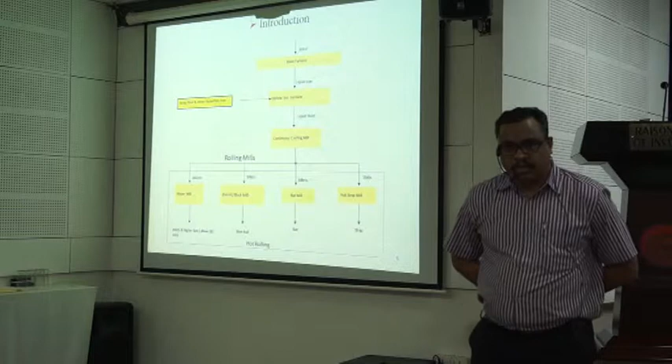How much time are you planning to take? It will take 40 or 50 minutes. Are you comfortable if I ask questions in the middle? No problem. No sir, we can answer at any time. No problem.

So this is the single line diagram showing the flow of a generalized steel industry. This complete research work is for Sunflag Steel—this part shown here is a part of Sunflag Steel. So the rolling mill is the area of interest for this research work.

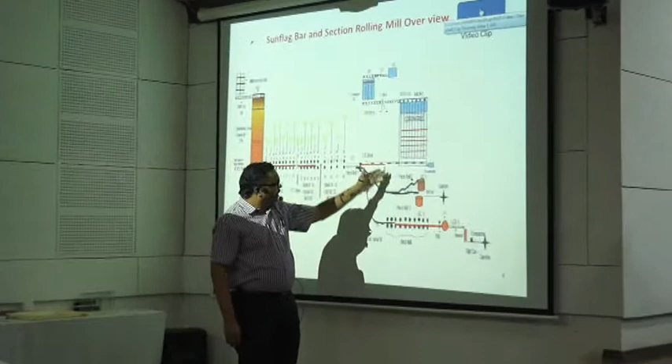So this is the overview of the research work. We'll start the video—overview of the research work, and this is the backup mill. This backup mill is the focus of the research work. Here the mill, the backup mill, is fitted to all three lines: the cooling bed, the garret, and the block mill.

This video clip shows exactly where this research work was carried out. These are the coolers, and these are the boards which are controlled by this PLC logic and related systems. This mill is called a continuous steel mill because the material starts from stand number one and continuously goes to the other stands without a break—that's why it's called a continuous mill.

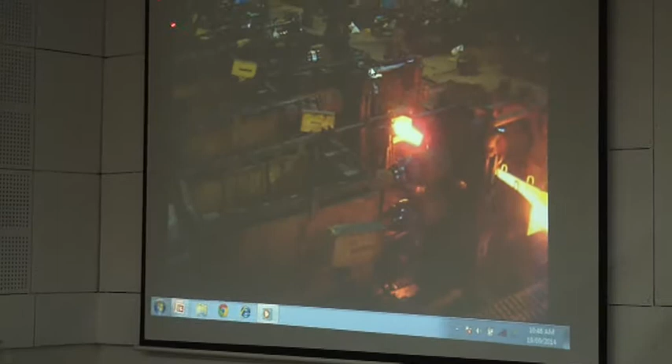So this part is called the roughing mill, then after that the intermediate, and then the finishing. Here this is called the stand, which is connected with the universal shaft through the gearbox to the motor. So the load is transferred from here to the motor.

So when you say motor, please clarify whether that is a DC motor or an induction motor. For this particular case, the main drive is a DC motor and the blower is an AC motor.

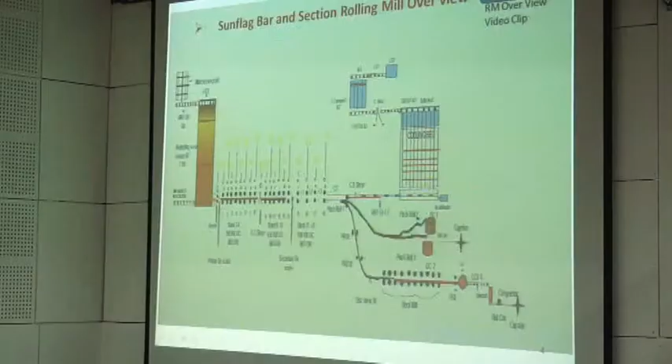It's very common for industrial people to say motor.

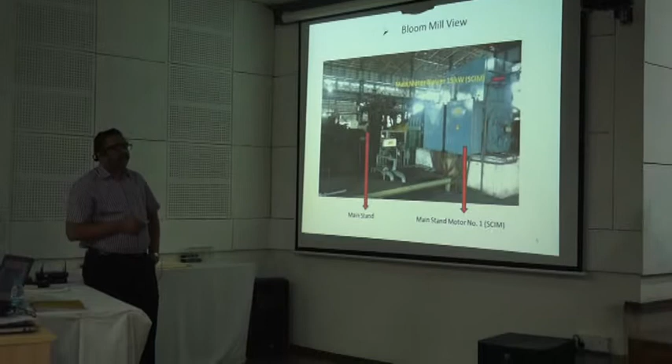This is another example, the bloom mill. Here this is the AC motor, and this bloom mill is a single stand mill. That is what is suggested by the expert, as they include AC motors also in the research. That's why this part is included here.

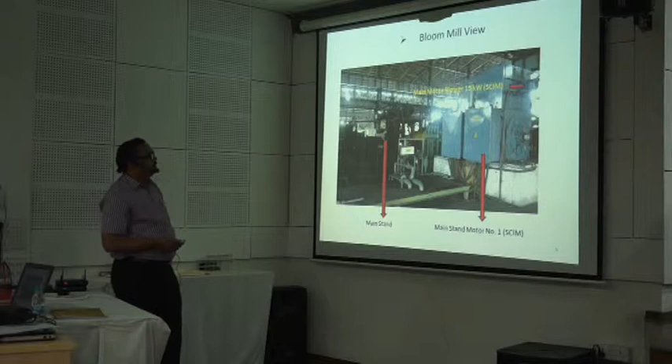So this is another view. The two motors are connected to a single gearbox, and this single gearbox is driving the single stand.

What is the gearbox ratio? The ratio is 50:1.

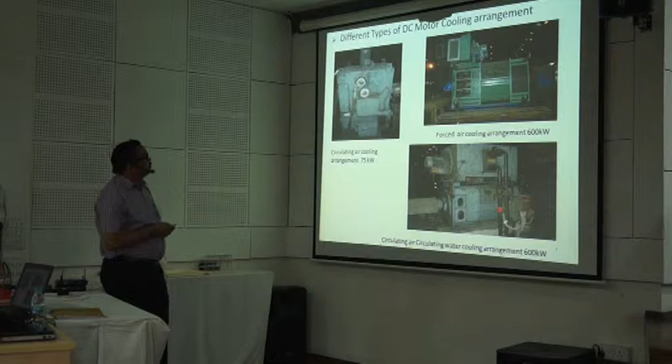Now these are the different cooling system arrangements for the DC motor. This is the circulated air cooling system, normally used for small motors. This is the forced cooling system, and this is the circulated water cooling system, which is the area of interest for the research work.

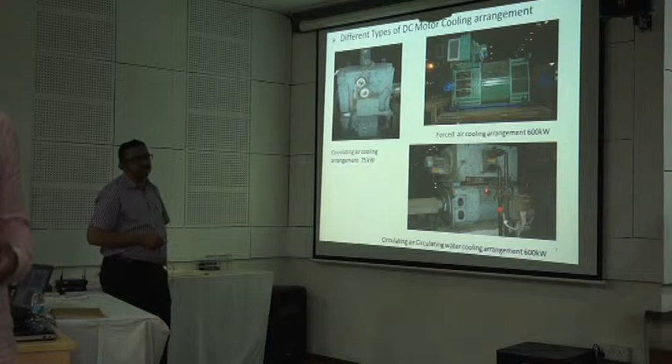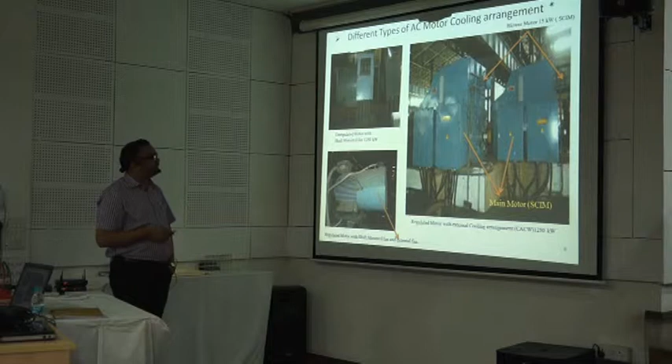This is the different arrangement for the AC motors. This is the 1250 motor without any cooling system, only a shaft mounted impeller, which is sufficient since this is an unregulated motor running at fixed speed. Here this is the regulated motor, so an external cooling arrangement is provided. When this motor runs at low RPM, the cooling can be adjusted by the external cooling system. This is our area of interest where we carried out the research work, on the regulated motor that can run at lower or higher speed.

I want to show you how this cooling system works, this is the DC motor, this is the AC motor. This is the cooling system, entirely separate from the motor. This is the system animation of how the cooling system works. This is the heat exchanger from where hot air is received, then cooled, and then passed through the motor. This scheme is the same for both AC and DC motors.

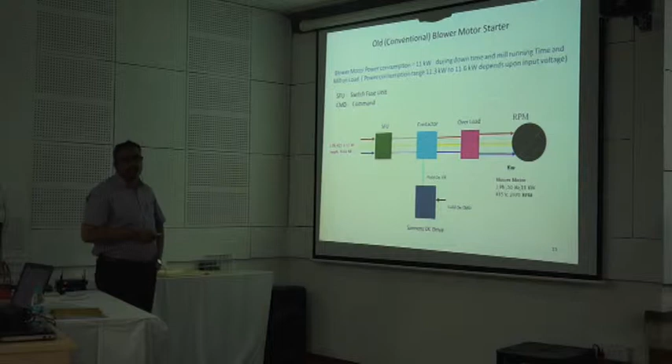This is the conventional starter used for the blower of the AC or DC motor. This is the normal DOL starter, so we can say the power consumption of this blower motor is at rated level. The rated power of the motor is 11 kW, even though it shows 11.3 or 11.6, depending on the input voltage. If there is a change in the input voltage, this output will change.

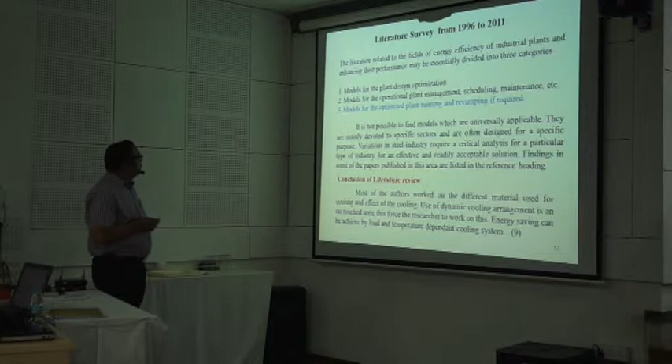The literature survey was carried out from 1996 to 2011 and divided by me into three parts. The interest is in models for optimizing the running, since both are considered only in the design stage. From the literature survey I chose the 9th paper, and from that paper I concluded that the dynamic cooling system is an untouched area. This forced me to work on this area, where the cooling system will work based on load and temperature dependency.

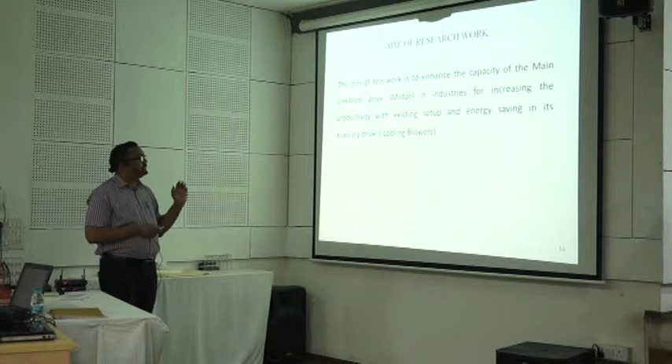So the aim of the research work is to enhance the capacity of the main motor and achieve energy saving on account of the cooling blower's auxiliary drive.

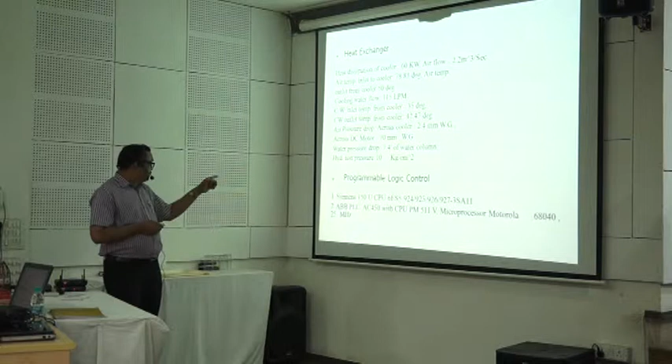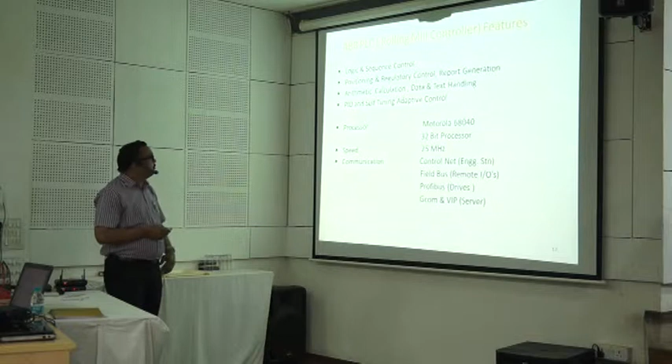This is the programmable logic unit, used to check whether the existing system provides the facility for implementation of this work. That's why I checked the PLC also. These show how I collected the data and what features are available in the ABB system, so it can be checked against the requirement. These are the IOs, to check whether spare IOs are available for implementing the system.

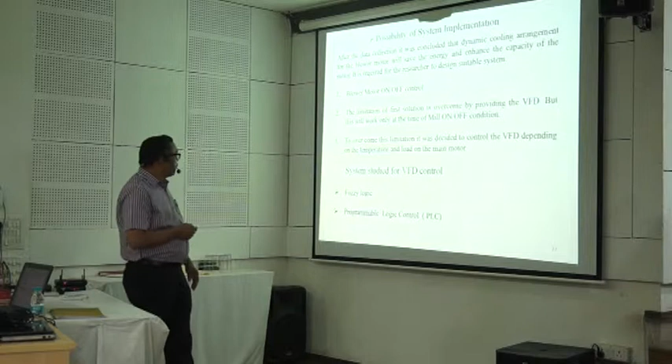Inference is done for this fuzzy logic: the load on the main motor varies by 5 to 10% continuously, and fine control or continuously changing the reference would oscillate the blower. So this is not recommended.

Another point is that the additional saving with fuzzy logic control is approximately 3%, which comes around 2 lakhs, while the investment for implementing fuzzy logic is around 8 lakh rupees. So the payback period for this is almost 4 years.

In industry, a payback period of more than 1 year is not acceptable. So I concluded that if we want to use the fuzzy logic system, it can be used when purchasing a new system or new installation; in that case fuzzy logic can work.

Hence the concept was not worked out rigorously, however the results confirmed the validity of the proposed thought. This is the first model developed by me for adapting the temperature from the motor.

Next, this is the current adaptation model. I need the signal from the main motor for the current to go to the PLC. This model was developed by me.

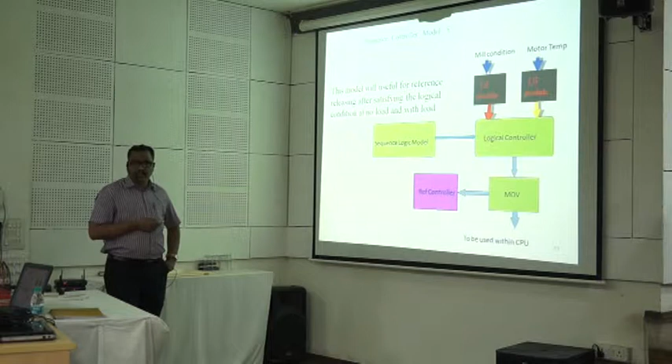So this is the sequence controller. It will work with the on-off condition and with the running condition also. This is the basic difference between the sequence logic and the sequence controller, and all these things will go to the reference controller. This is the integrated model of that 5 module.

You should first start with this, and then start explaining other things, not the concepts. This is the overall view of the system, and then keep giving explanation to each of those subsets. Okay, sir. Right.

So this is how the PLC is interfaced with the hardware. This is the display, and this is the drives, and this PLC is connected with this drive, and these are all the inputs to the PLC.

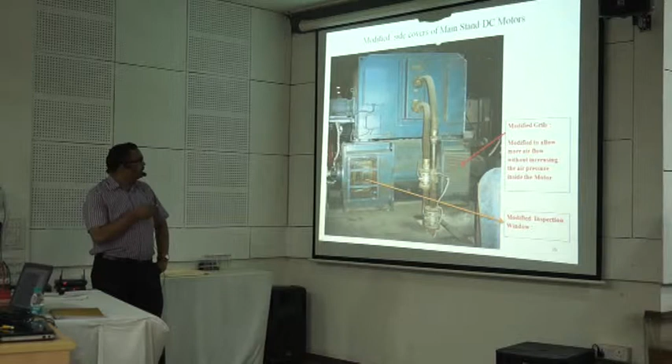So this is to accept the higher speed above 100% of the blower. This modification was done by me, that I provided the grill so that the pressure inside this motor should not increase when it is required to run this blower above 100% speed.

Now this is the algorithm made for this system, for the DC drive. The initial conditions: all inputs are 0. The first step is to switch on the field. If I switch on the field, then the blower motor will run at 50%, and this is the voltage equivalent given to the PID.

Then the next is the armature. If we switch on the armature, the field will fire at 100%, so it is required to increase the speed of the blower motor. Then, with the run command, this motor will start running, and we know that the armature current is very low, so it is not required to increase the reference of the PID. So it is controlling the temperature.

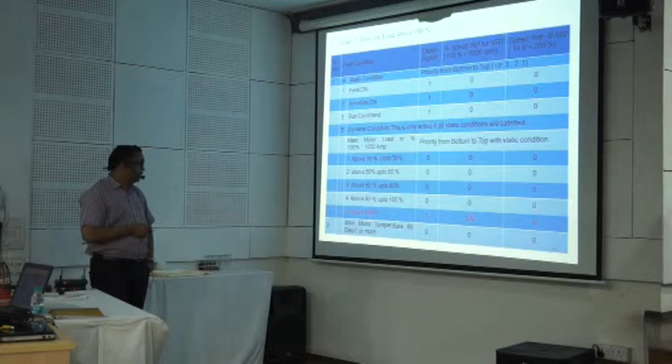Then the other conditions are the dynamic conditions, and all these conditions depend on the load. Now, if the load is this much, this reference will release to the VFD. Then if the load changes, this reference will go to the VFD. If this is 100%, then the maximum reference will go to the VFD.

Now, if the temperature increases above 80 degrees, all these conditions are bypassed, and this model will work with the temperature condition only. Unless and until it brings the temperature down to 80 degrees, all these conditions will not work. So that's why I've written here that the priority is from bottom to top.

So this is for the AC motor. The basic difference is that in the static condition, the converter is on; in the DC motor, the field is on and the armature is on.

Excuse me. What is the controller for your main DC motor? Main DC motor drives, the main drive. What drive is that? DC drive. Is it a converter fed DC motor drive? Yes sir, converter fed DC.

So why is it that you can't control that based on your load? Which drive, in terms of energy saving? Drive control, yeah, so drive - you can't touch this one. This, you don't want to touch that. DC motor drive, yes, that we cannot control based on the load. With load, it is the requirement of the load. The drive is driving the load. We cannot control that drive based on the load.

No, listen, what I'm trying to convey is for the given load on the converter fed DC motor - yes sir - is there no way to, what I say, go for energy saving such that you do deliver the load but with power saving in the main motor itself? Main motors are not made for power saving. It is that by fine tuning the parameters of the speed controller and the current controller we can do that, but that is part of the DC motor.

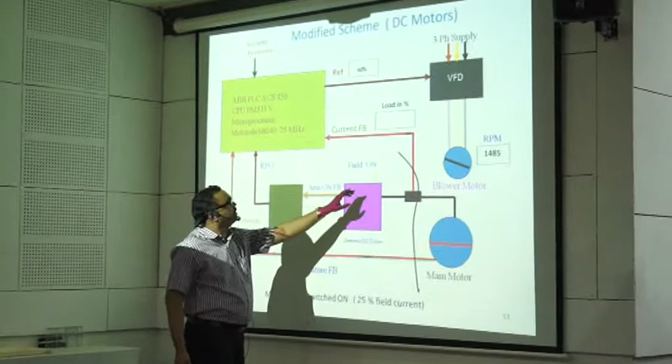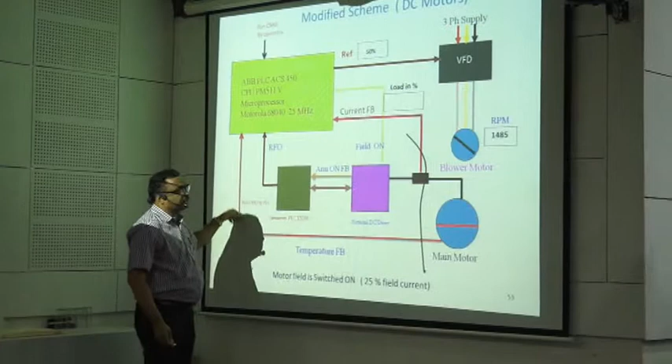Now this is the Siemens drive, and this feedback is given to the PLC. Then armature on feedback, it is going again to the PLC, and this is the temperature monitoring system of the main motor, not the blower, the main motor's temperature monitoring system.

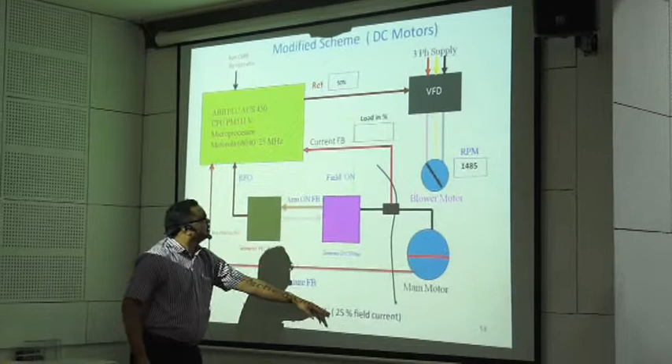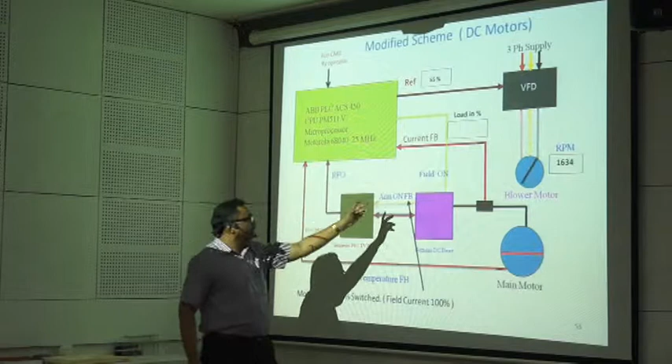Now he has given the field on command. The reference is at 50%. Now you give the armature on command. He has given the armature on command. Armature on feedback will go to the PLC, and then this reference will change, and according to that the blower RPM will change.

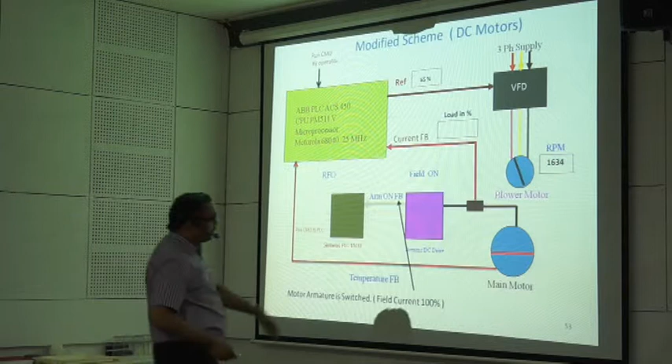What happens if there is a fault in the DC motor? If there is a fault in this motor, the main drive will dip, and then the field is withdrawn. If this command is withdrawn, then this will stop.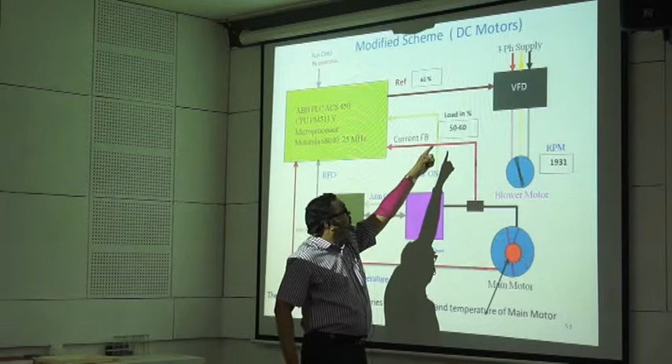Now he has started this DC motor. There is no load on the DC motor, so there is no change in the reference of the VFD, as I explained. Now he has loaded the DC motor. Now according to this, the reference is changing, so the load is changing as per that.

This RPM was changing, and this temperature is monitored through this.

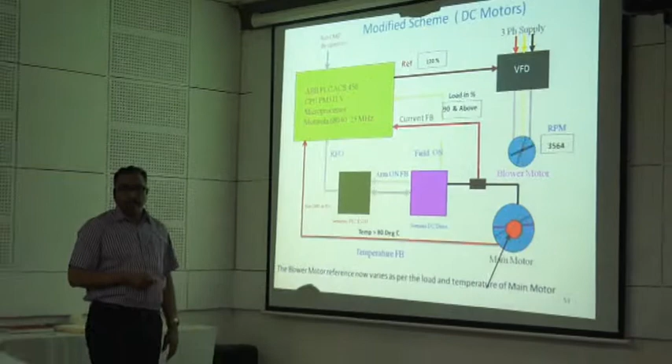What do you think is the typical time constant, the so-called thermal time constant of the DC motor drive? Will it be in milliseconds, seconds, or minutes? The thermal time constant is in milliseconds.

Are you sure? For control, you are saying. I say there is an armature time constant, there is a thermal time constant, there is a mechanical time constant. So what I'm asking is, what is the thermal time constant in seconds? I'm not asking about the controlling of this drive, and I'm not asking you what the sampling time is.

Now the converter on command is given, and the motor started. Then the entire system will work on the load feedback, so the feedback is going from here to the PLC, and according to that this reference will be controlled.

Again, I have a comment only on this diagram. You must explain it clearly to me. Sir, I mean, the idea is I want even the public at large to understand that. It explains very well the kind of ideas you have put in your thesis, mainly from that point of view. Please explain that nomenclature. This is very...